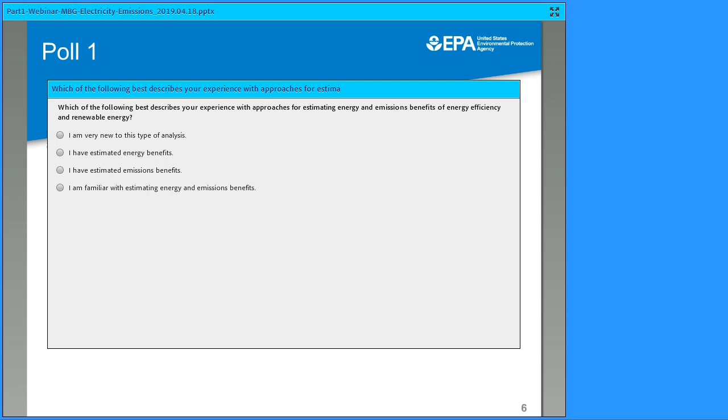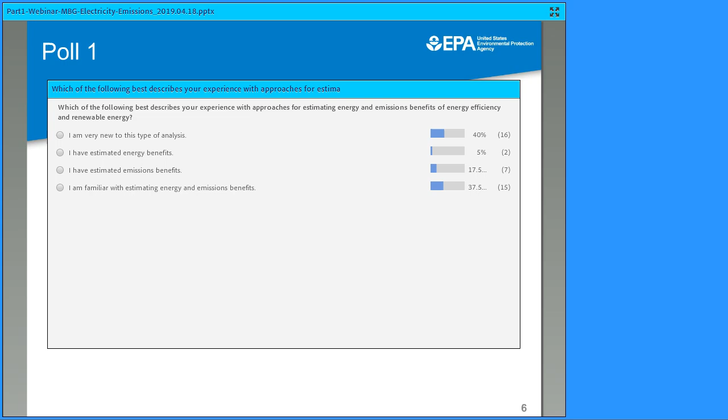Okay, so it looks like we have a good split of a lot of folks that are new to this type of analysis, and then some that are familiar with it. So this is a nice range of folks to have on the call, and we're hoping that we can increase everyone's knowledge about quantification a bit this afternoon. So the way that we're going to work from here is that I'm going to start the presentations today by giving an overview of a resource that EPA recently updated called Quantifying the Multiple Benefits of Energy Efficiency and Renewable Energy, a guide for state and local governments.

You can use this guide to learn more about different methods and tools that you can use to quantify energy and emission benefits. Speakers after that will be talking about those methods and tools. We have a great lineup of analysts who will talk about their own experience quantifying energy and emissions benefits from energy efficiency and renewable energy, describing a range of basic to sophisticated methods and tools that are also described in the multiple benefits guide that I'm going to talk about first. So without further delay, I'm going to jump right into the overview and give you information about the multiple benefits guide.

The resource that I want to talk to you about today will give you a lot of information about methods, tools, and data sources that you can use to do your own analyses of emissions benefits from energy efficiency and renewable energy. The guide is divided into two parts. The first part talks about what, why, and when you would quantify the multiple benefits of energy efficiency and renewable energy. The second part gives you information about how to quantify them, so the different methods, tools, and steps that you can use.

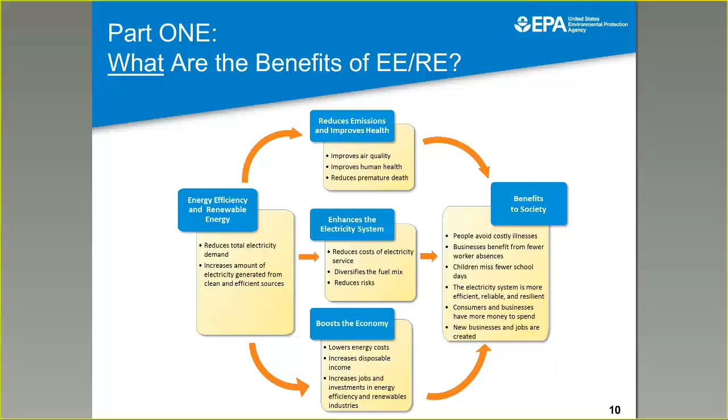It can also boost the economy by creating jobs and saving money. Collectively, energy efficiency and renewable energy can generate great benefits to society, and we talk about that in the guide.

Then we also talk about when and why you would quantify multiple benefits. There are essentially two points we'll talk about. When you're designing policy options, you're considering a whole list of different programs that you might implement. That's a good time to stop and think about what are the potential impacts of these options I'm considering, and how much will they bring me closer to the goals I'm trying to achieve. What kind of benefits will they deliver for us?

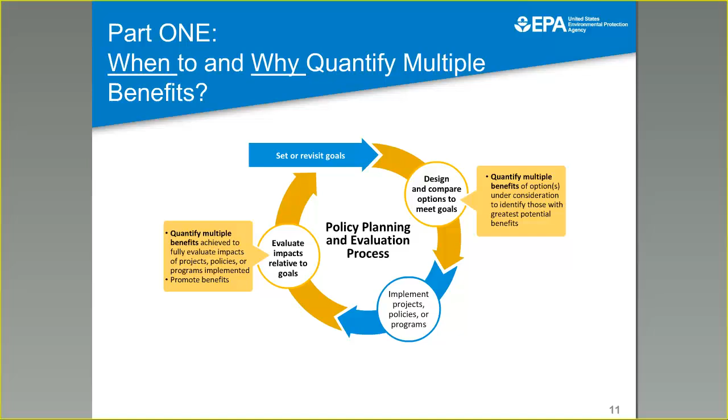Then it's good to go back after you've designed policies and programs, or after you've implemented them, to evaluate the impacts. Did they meet your goals? Did they get you what you were looking to achieve? And if not, maybe you need to modify the design of the policies or programs.

Once you get to part 2 of the guide, it talks about how you can quantify multiple benefits. From here, with any analysis, you have key considerations. You're going to identify the purpose, the priorities, and the constraints that you have for your analysis. It's important to understand the different types of methods available to you, and I'll talk a little bit about that in a few minutes. Then it's important up front to map out the strategy for the analysis.

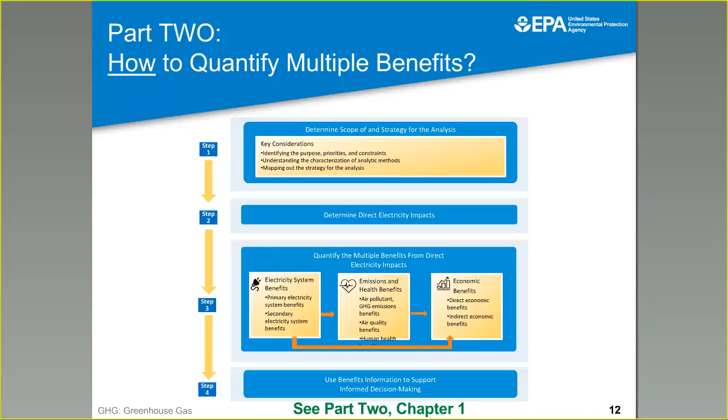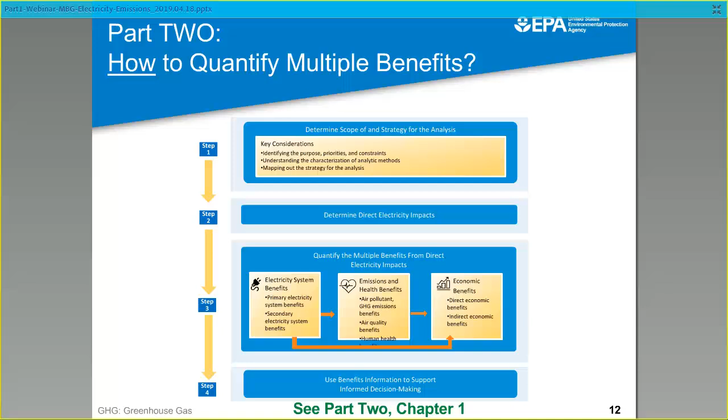From there, you quantify the direct electricity impacts. That's really the foundation for any subsequent benefits analysis, figuring out what are the electricity impacts that you're going to then use to quantify the electricity system benefits, the emissions and health benefits, or the economic benefits. Together you can use that benefits information to support informed decision making.

So what we have today is, as part of choosing a method for quantifying the impacts, there are some considerations that you'll think about. And those include: what benefits do you care about?

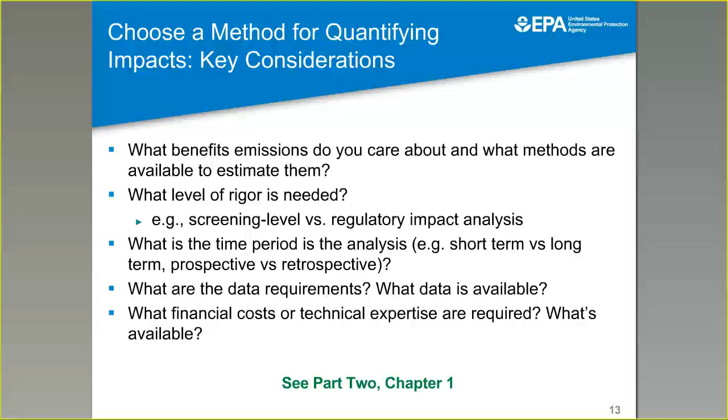For example, in this call, we're talking about emissions benefits. What level of rigor is needed? Is it a screening level analysis or a more rigorous regulatory impact analysis? What is the time period of the analysis? Is it short-term or long-term? What kind of data do you need? What kind of data do you have? What are the financial costs or technical expertise required of a particular method? And what resources do you have available for it? These are all things you'd have to consider regardless of what analysis you're planning.

But you can then use the guide to map out the different benefits that you're going to quantify and look at the methods that are available for you. This schematic depicts the different chapters in the multiple benefits guide, showing how, starting with direct electricity impacts at the top, you can quantify either electricity system benefits, the emissions and health benefits, or economic benefits. Today we're going to be focusing on the top two boxes really—electricity benefits and the emissions benefits.

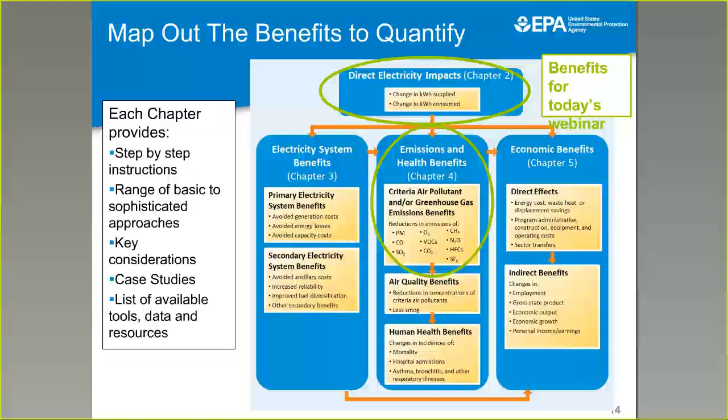In each chapter, you'll find step-by-step instructions, as well as a range of basic to sophisticated approaches that you can use. We have key considerations that give you tips on what to do as you're planning and conducting your analysis, as well as case studies and lists of tools and resources that are available for your purposes.

Here's an example from the chapter on estimating direct electricity impacts. You have options at this point of an analysis. You can either adapt existing studies that others have done for similar programs, for different energy efficiency or renewable energy programs, maybe in a neighboring state, adapting it to your own conditions or assumptions. You can also use data from energy efficiency or renewable energy potential studies to set some targets and goals for what you'd like to achieve through your policy or program, or you can conduct your own new analysis using different methods and tools that are available.

There's a range of assumptions that you would need to consider, and you can find more of them in the guide. For example, the program period—how long will this program be in effect? What is the target of the program? What is the anticipated compliance or penetration rate—basically, how many people do you think you're going to reach through your program? How long are the savings going to last?

This is particularly important for energy efficiency. These are things you need to be thinking about, and the guide describes these assumptions with information about specific ways you can think about it. Transmission and distribution loss is something you can calculate into your estimates that you want to take into account, and also other assumptions like funding and program administration—how is your program going to be funded, and does that take away from the amount of money you might actually put towards the program? There's a variety of considerations that go into your estimation of direct electricity impacts, and you can learn more about those in the guide in Chapter 2.

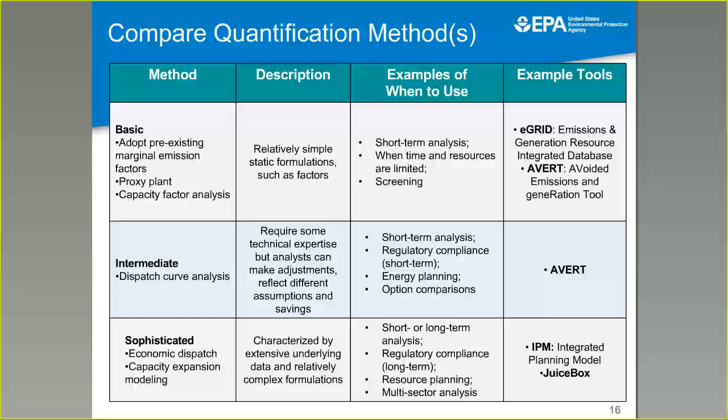At the other end of the spectrum is sophisticated modeling, which is more dynamic, more complex, and can be used for short or long-term analysis. An example of that is JuiceBox, which David Abel will be speaking about his experience using sometime during today's webinar. So there's a range of approaches you can choose, and there are lots of tables in the guide that can help you compare across the different methods in more detail and tell you the strengths, limitations, when you might use them, and examples. There are also flow charts and figures that can help you navigate the process and figure out, in a stepwise fashion, what you need to do given the approach you've chosen.

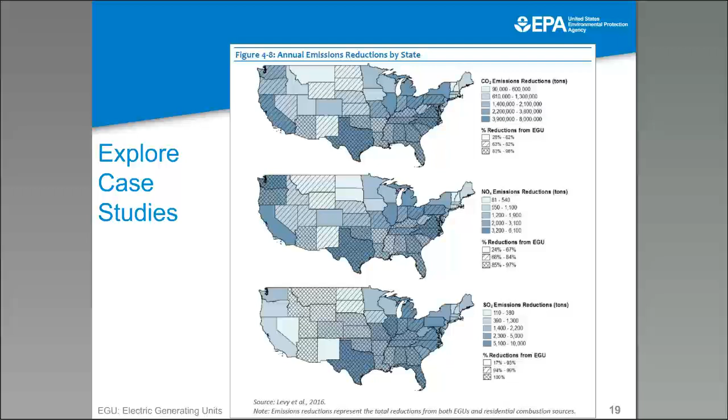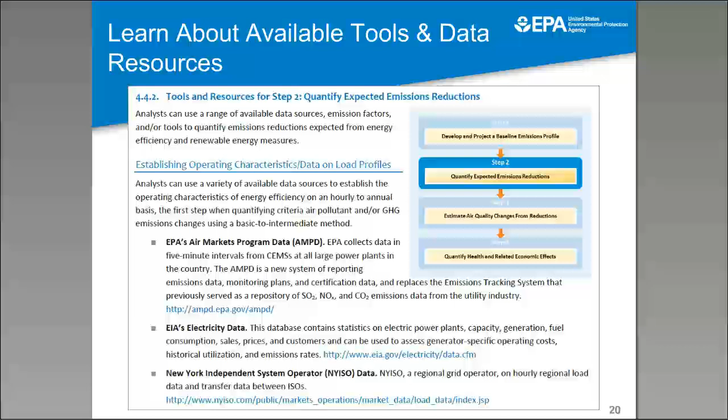And there are a lot of case studies that you can look to, to see how others have quantified similar types of policies and programs through their analysis. And finally, there's information about available tools and data resources that you can use for each chapter and for each step of the process that we described for you.

So with that, there's a link to the guide right here that you can link to, and we'll be posting the slides. You can certainly find it here, or by Googling it, or looking on our website. Essentially, I hope that you can look to this resource as something that can guide you in your efforts to quantify electricity and emissions benefits of energy efficiency and renewable energy.

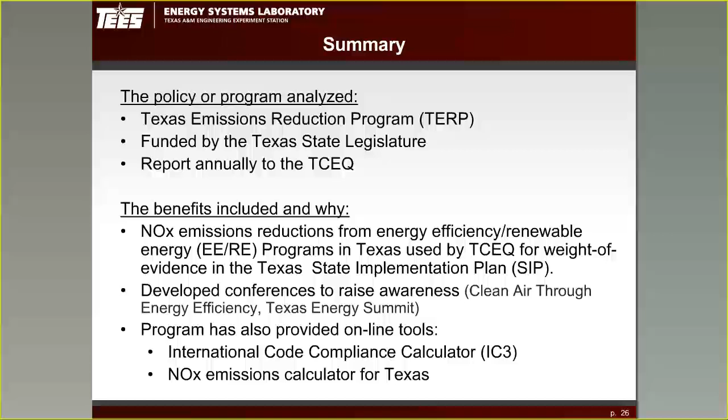Similarly, we were asked, how do we quantify the benefits within the state here? In general, we quantify each year's benefits as we go forward. We've been doing this since 2001, and we use the method for actually weather normalizing these savings back to the base year.

So depending upon which entity we're measuring, we use change point linear models for weather normalizing things such as wind energy savings. We use sliding averages on some of the data to give us some idea of how some of the wind farms are producing lately. And then we have special purpose models for things like solar PV and solar thermal analysis that were developed by the University of Wisconsin.

The data sources that we get our data from are the participating state agencies, the State Energy Conservation Office, SECO, Public Utilities Commission, TCEQ, and then the ERCOT, who provides a lot of the electricity data that we use for our basic analysis.

We also rely on data from 4 federal agencies. The EPA provides us with eGrid. National Renewable Energy Laboratory tracks a lot of the installations of renewables. And NOAA provides us with the weather data and the Energy Information Administration as well.

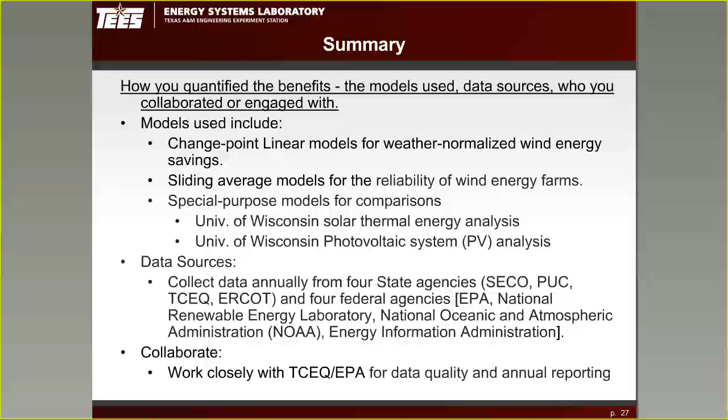So we're having to reach out to a number of agencies, and then we turn around and provide results to a number of different agencies. All of this is done very closely in collaboration with the TCEQ, and of course we do have a lot of oversight and cooperation with the EPA for our data quality and our annual reporting.

So our work was legislated within Texas. Back in 2001, we were faced with a very strong mandate to improve the air quality within the state. So our original legislation was set forth to enable this work.

I'm not going to go through this in detail, but you can see through the years it's been added and modified clear up until the current time, where we have a number of specific responsibilities that the lab has to produce as part of our funding from the legislation. Part of that is the actual calculations of the emissions reductions.

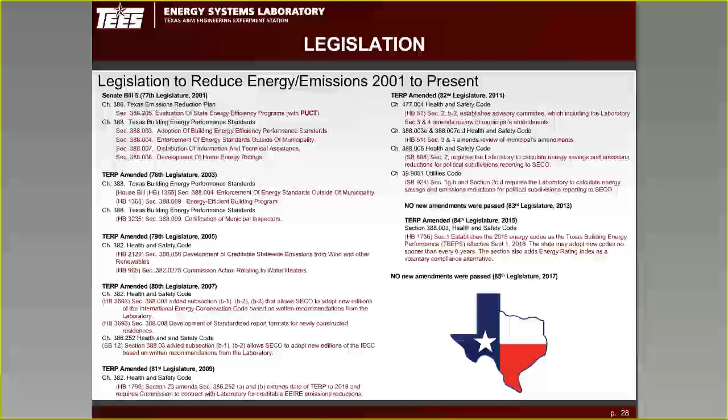Our credit for the emissions reductions follows the EPA criteria for SIP credits, which have 4 primary elements. First, the emissions reductions need to be quantifiable. So we have to provide a method for quantifying the emissions reductions. We need to review that method with TCEQ and EPA, and then we use that method year after year to quantify the emissions. That method needs to make sure it doesn't account for savings that are already accounted for somewhere else, so we have to be careful of any surplus accounting and abide by that accordingly.

We also have measures that need to be enforceable. For example, building codes are enforceable. When you install a wind turbine, it's something that actually exists, not a hypothetical thing. Similarly, we have to perform the record keeping. So if somebody wants to go back and look at the savings in 2013, 2015, or 2006, all of that is kept online in the format required by the TCEQ.

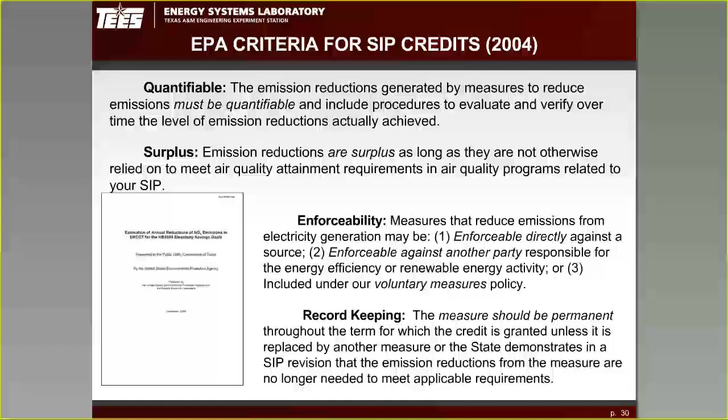As I said, this is part of a larger program that does emissions reductions from not only renewable energy but also energy efficiency. There's a number of areas we do emissions reductions on that I won't be talking about today, but we have information available on our website about that. For example, single-family construction, multifamily, commercial construction, and this is construction to code or above-code programs. Likewise, green power production, which I'll be talking about today.

We also take information from the public utilities programs, energy efficiency efforts, and incorporate that into the emissions reductions—energy efficiency programs managed by the State Energy Conservation Office. One item here, and we've had additional items from time to time that we're tracking, is air conditioner improvements as people retrofit their houses and commercial buildings around the state.

So today I'm going to be talking about the savings from renewables. Primarily we'll be talking about savings from installations of photovoltaic, both on residential, commercial, and utility scale, solar thermal installations, hydroelectric, biomass, landfill gas, and geothermal installations. However, the big ticket item, as we'll see from some of the results coming up, is the emissions reductions from the wind farms that have been installed around the state since about 2004, 2005.

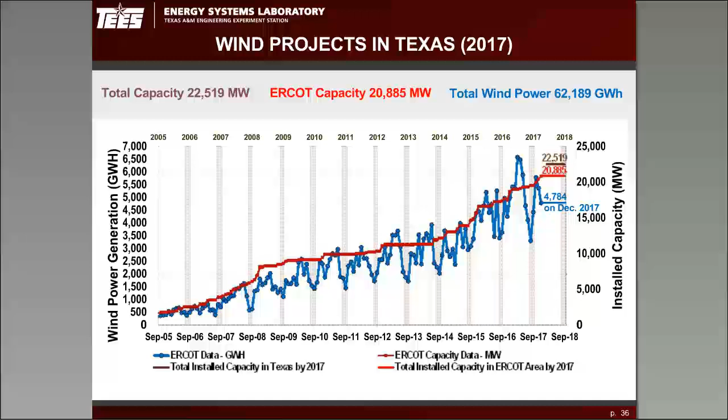This graph with the shaded bars going down shows you the years we've been tracking wind farm electricity production. You can see the dog days of summer, which are the shaded bars, are the periods when we tend to have the lowest production of wind. Those are usually during the summer period—unfortunately, when the electricity requirements are the highest. So there is a bit of seasonality to the wind within the state.

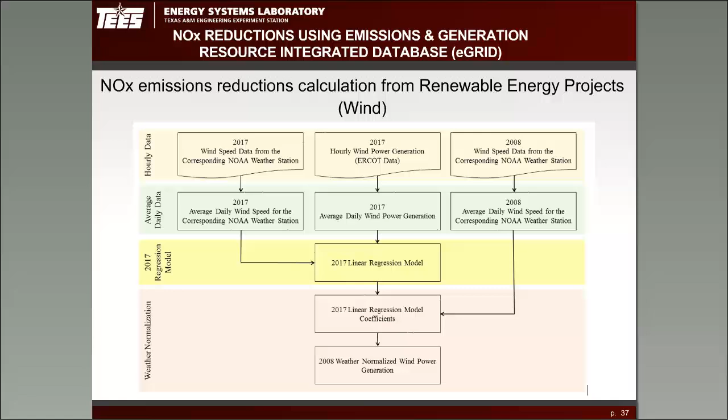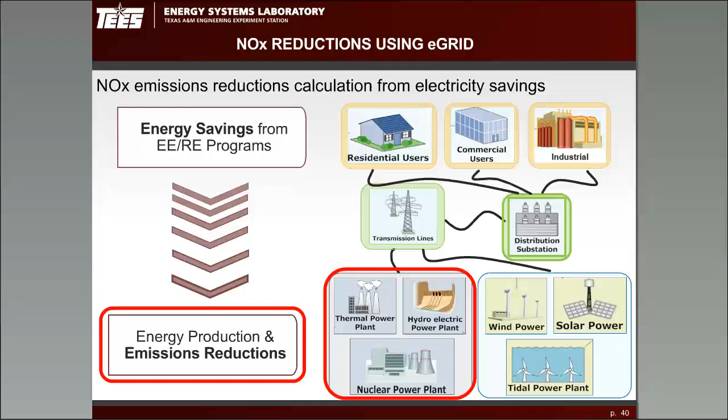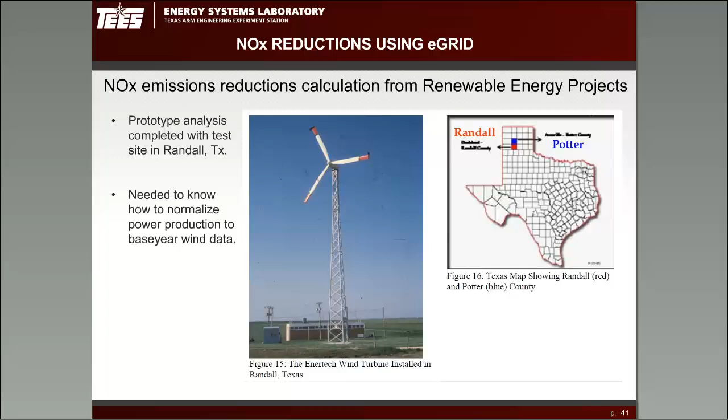So if we look at wind energy, for example, one of the early sites where we tried to prototype this was a research facility up in Randall, Texas, where we had an Enertech wind turbine. We looked at the data coming off of that wind turbine and found there's a pattern to that data, which you can see here.

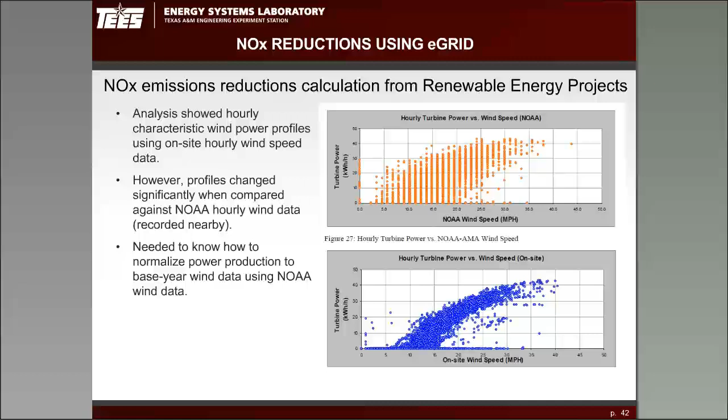The upper orange dots are basically the power coming off the turbine plotted against NOAA wind data. The blue dots, which are much better defined, are the same wind power plotted against on-site wind measurements. One of the problems is that it's more applicable to use the NOAA wind data than the on-site wind data, so we shifted from the on-site wind data to the NOAA wind data.

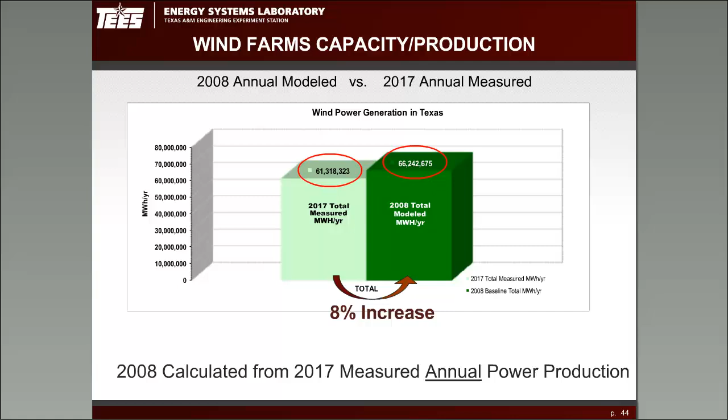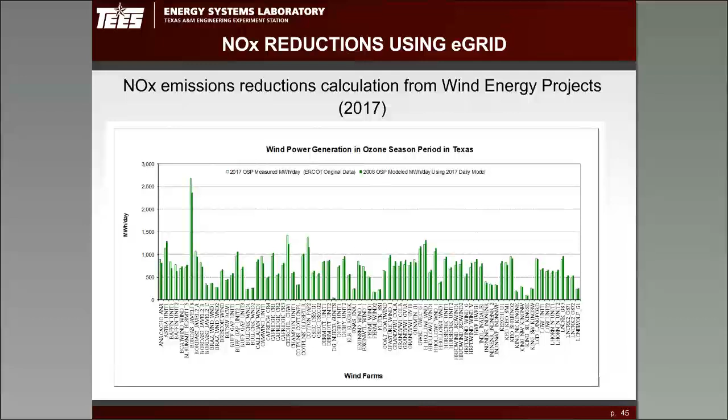We developed daily regressions, change point linear regressions, which give us the average daily wind savings, and we use that to do the forecasting. So in this case, we're actually able to take 2017 data and backcast it to the 2008 base year. We've done this now across all the wind farms in the state, so that looks something like this when you add it all up, giving us the total savings for the wind farms.

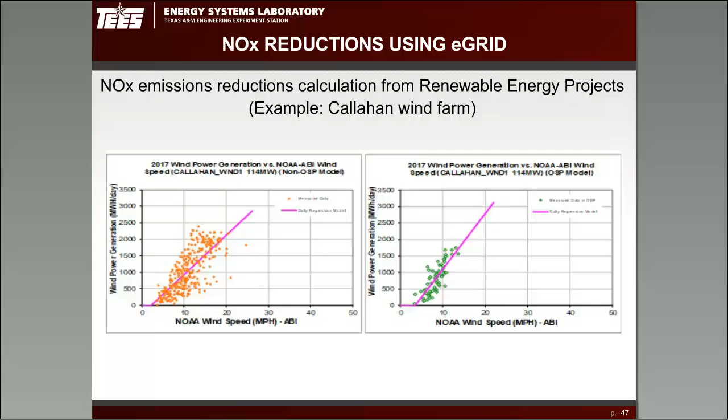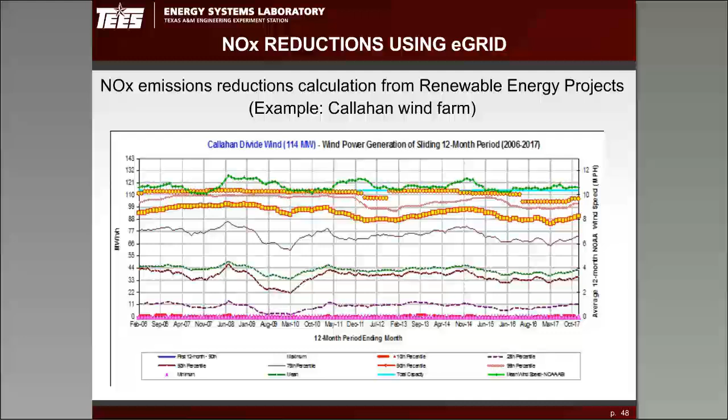Here's another example from one of those wind farms, the Callahan wind farm. Here's the actual hourly data, the daily average data during the ozone season period and non-ozone season period, and what it looks like when you've been tracking data now for 10 to 15 years. You can begin to start answering questions about how reliable that data is.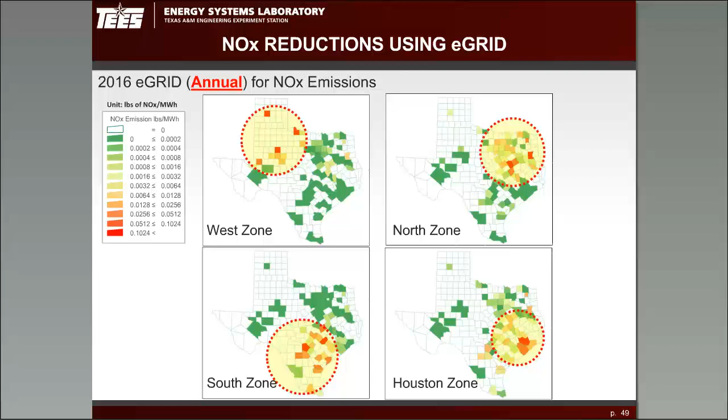We know exactly where the power plants are in the state thanks to eGrid, so we're able to track that and then take it back to the power plants that would have provided the power during the periods the wind were blowing. In Texas, we have 4 congestion management zones shown there, and that's how we divide things up around the state.

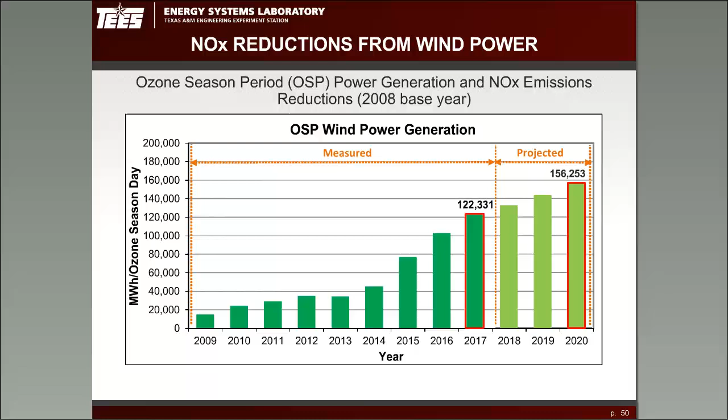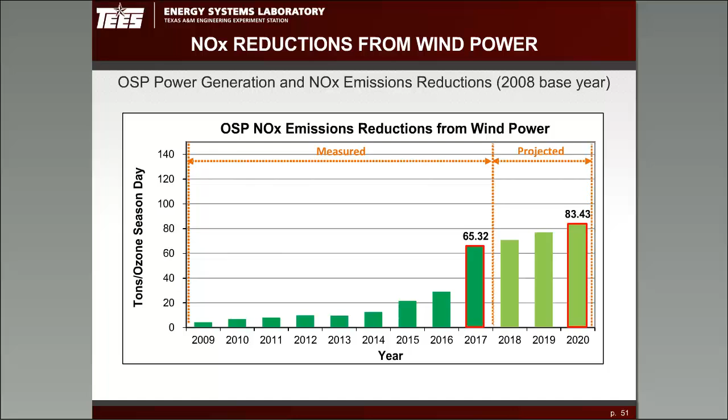The results we've seen for wind energy production, for example, last year were about 122,000 megawatt hours on an ozone season day. The actual NOx emissions reductions were about 65 tons of NOx on an ozone season day. You can see a dramatic jump between 2016 and 2017, which was basically a resetting of the numbers within eGrid.

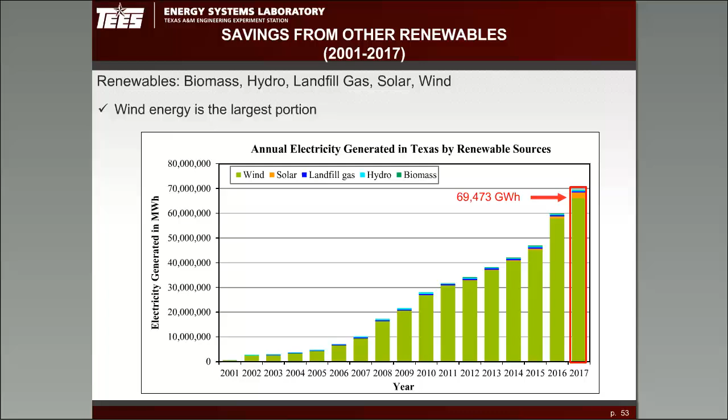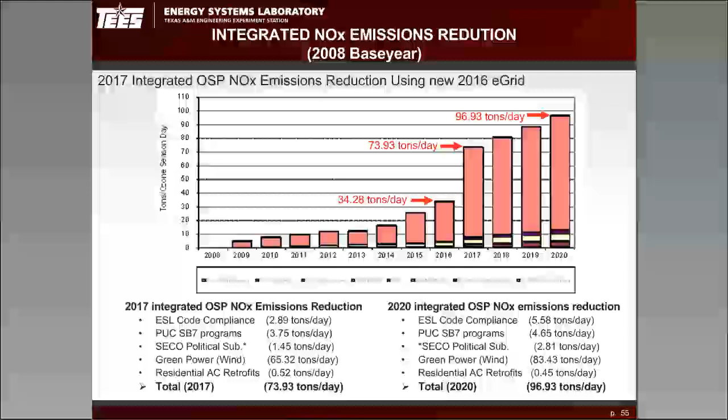This is what that looks like across all the projects, and the results of the analysis we report to the legislature. The outcomes have provided Texas with NOx creditable emissions that can be used in the weight of evidence. The challenges, of course, are gathering all this data, coordinating across state agencies, and doing this over a 17-year period.

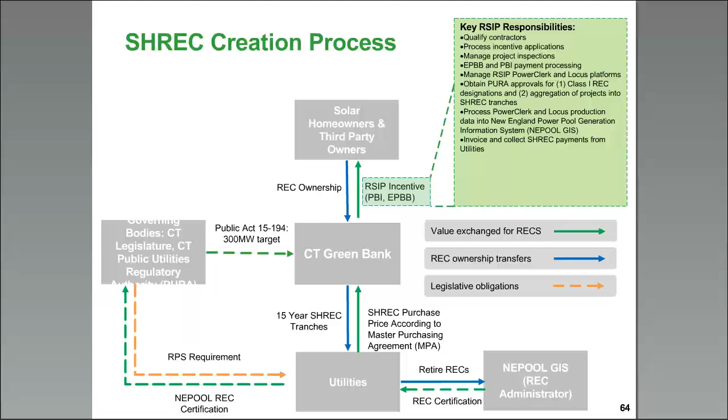We started working to sell those, and through that process we started getting feedback that investors really didn't just want something to be certified in terms of a transaction—they wanted to know what the impact was. So we thought this is a great opportunity for us to showcase to impact investors what we're actually achieving through this, and what they can achieve by joining in on our transaction.

So this is all just an overview of what we did for the SHREC transaction, which ultimately ended up being about $38.6 million we took to market. So what is the actual impact of the SHREC bond? What's the impact that the investors in this would have? We wanted to model that.

At the Connecticut Green Bank, we have some pre-established methodologies across the organization, but we didn't just want to use those—we wanted an outside opinion. So first we said, let's make sure we get this rated by an outside verifier. We engaged, through an RFP process, Kestrel Verifiers to assess the bond. They did a certification, and we have filed our paperwork.

We're still awaiting the official stamp, but we have no reason to believe it won't be certified as a climate bond per the Climate Bonds Initiative standards.

We really wanted to get that impact quantified, and we wanted some sort of outside methodology that would be trusted by the market. We wanted to say: what did these achieve? What greenhouse gases were avoided? How much cleaner is the air? What were the public health impacts? What were the economic impacts? So we engaged with the Climate Action Reserve to do that.

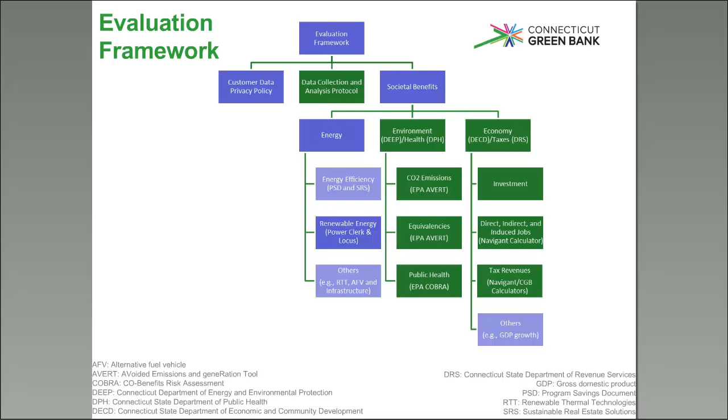Just as the Green Bank, we have our overall framework of evaluation, with a bunch of different methodologies that we can use. Here I'm going to focus on our environmental methodologies.

We employed AVERT about two years ago as our new official methodology for estimating the impact of air quality improvements due to our activities. Initially we were doing this when looking at larger projects, to say, if we finance this wind farm, this is what we can expect the impact to be.

However, the vast majority of our projects, especially in the RSIP program, are small one-house rooftop solar projects or an aggregation thereof. So we needed a way to operationalize this, since we couldn't run each project through AVERT individually. Through a regression analysis, we developed factors that work in the state of Connecticut, taking the type of project—energy efficiency or solar—and using the standard built-in assumptions of AVERT to translate that into factors for NOx, SOx, CO2, and particulate matter. So we built that in.

We've automated that through our data warehouse, and with respect to the SHREC fund and every other program we had, we were able to create some estimates.

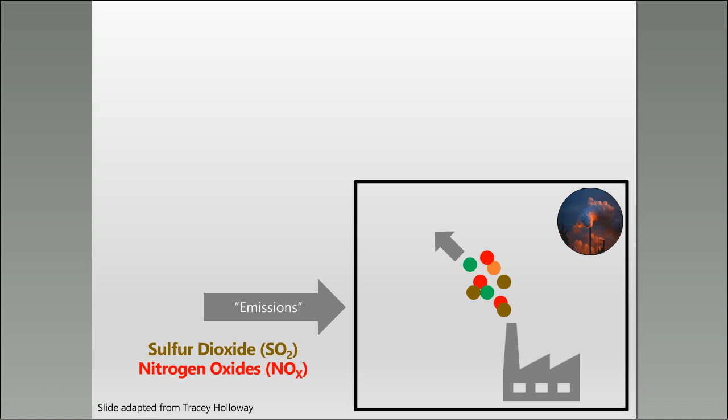Just to make sure we're all on the same page, when I'm talking about emissions, I mean emissions from power plants, predominantly two pollutants: sulfur dioxide, SO2, and nitrogen oxides, or NOx. The reason these are what I'm talking about is because what we really care about and regulate in the U.S., as far as criteria pollutants go, are ambient concentrations in the atmosphere.

The two pollutants that are really public enemy number 1 and number 2 for public health are fine particulate matter, PM2.5, and ozone. SO2 and NOx both contribute to PM2.5 and ozone in the atmosphere. And then, of course, we can't forget about CO2 as a greenhouse gas. We care about it for a slightly different reason, but it's very interrelated with all of this work.

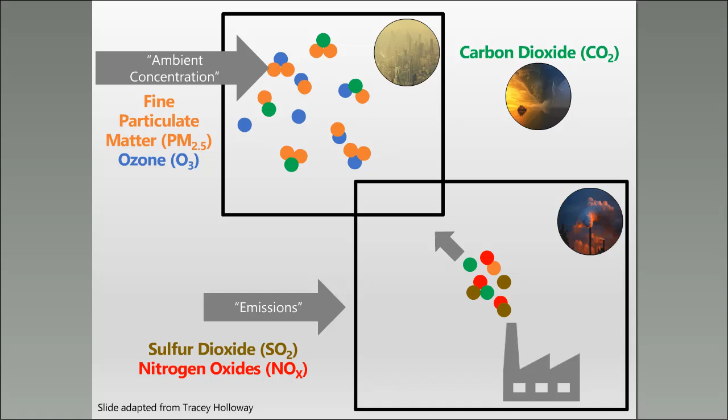Why do we care? Why are there air quality regulations to begin with? Why is anybody like me doing research, or funding this type of work? It really comes down to the fact that this is a big public health benefit to control and manage our air quality in the U.S. and globally. In the U.S. we spend about $50 billion a year under the Clean Air Act to achieve standards, and the reason we do that is because it has huge benefits. We've shown there are about 30-to-1 returns in health benefits from that $50 billion spent every year.

I'll show pictures here of concentrations of NOx pulled from a satellite instrument called the Ozone Monitoring Instrument, between 2005 and 2016. You can see the drastic improvement in air quality over the last 11 to 13 years. This 100,000 deaths a year in the U.S. is really to make the point that even though air quality has been a big environmental success story in the U.S., that's still the number we're working with, and still a big impact from air quality we have to address.

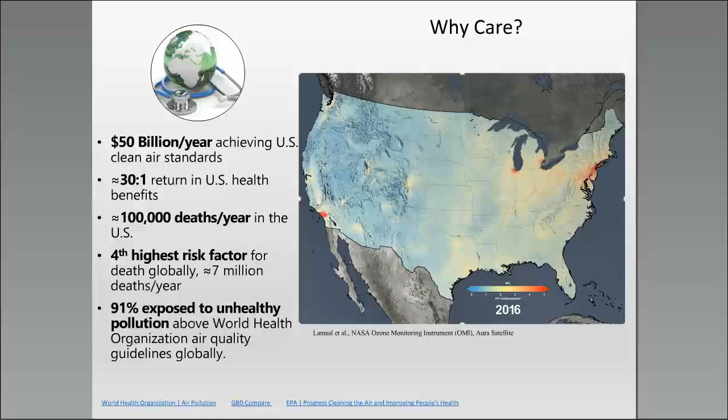And of course, if we zoom outside the U.S.—the work I'm talking about and most of what I've done focuses on the U.S.—but if we zoom out, it's a much bigger problem. I think the number that really epitomizes that is that 91% of the global population is exposed and lives in a region with pollution above what the World Health Organization deems as safe.

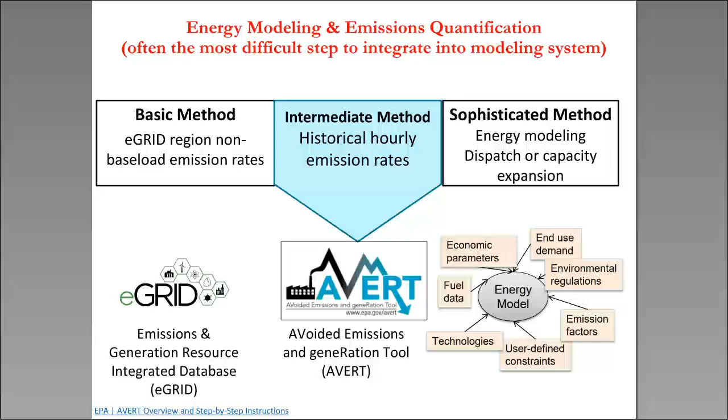So you have a model that actually simulates reality by taking in fuel prices, environmental regulations, emissions factors, and different technologies, and combines all of that to then calculate, in this case, dispatch—which power plant is going to produce how much energy and how many emissions, and when.

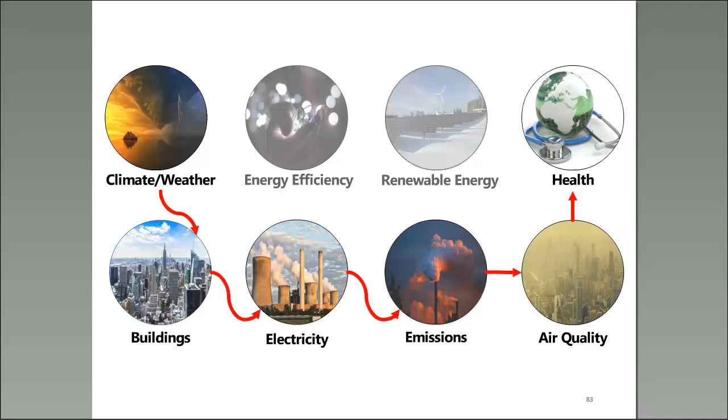The first thing I want to talk about is related to the benefits of energy efficiency and renewables, but actually more of a warning. This was a long-term project we worked on through the National Institutes of Health, recognizing that as the climate warms, one of the first things we're going to need to do to adapt to higher temperatures is cool our buildings more and use more air conditioning demand. That means we're going to have to produce more energy from somewhere to power those air conditioners. You can draw this connection all the way from climate and weather through building energy demand, electricity production, power plant emissions, air quality, and then health.

And that's what we did with a series of models. This work was published in a special issue of PLOS Medicine last summer on climate change and health, covered by The Economist, and was a highlight in Nature Climate Change. The way to think about this study is—I'm going to go through this fast so I can talk about two different things.

The way to look at this study is really just through three different scenarios: one being present day, current reality; then two future climate scenarios looking at what would be the impact of a warmer climate alone, in this mid-century adaptation scenario; and the third being what would be the impact of climate plus the added emissions from increased air conditioning use.

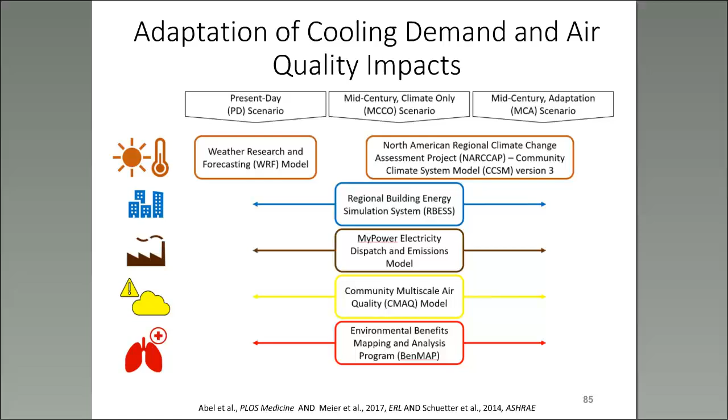We used a series of models, starting with modeling the weather and the climate—future weather—then running a building sector model to estimate what energy demand in buildings actually would be, and then feeding that into the real big model I want to talk about, MyPower, or JuiceBox, which calculates the electricity dispatch and online emissions from each power plant, before feeding into a chemical transport model that calculates the air pollution, and a health impacts model that then turns that into why we care about that air pollution change.

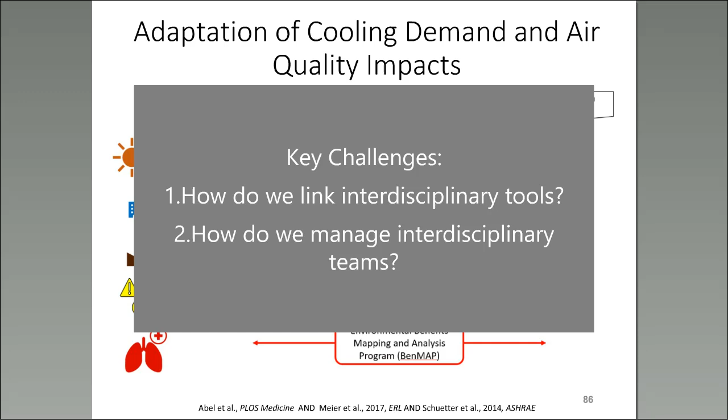So a couple key challenges with this work are: how do we link these interdisciplinary tools, and how do we manage interdisciplinary teams? This is often a big issue with sophisticated energy models, because in many cases those models were not built specifically to do air quality research or even emissions work at all. Or if they do emissions work, sometimes they stop at CO2 and greenhouse gas emissions because they're a little easier to quantify. So connecting all these steps together is definitely non-trivial.

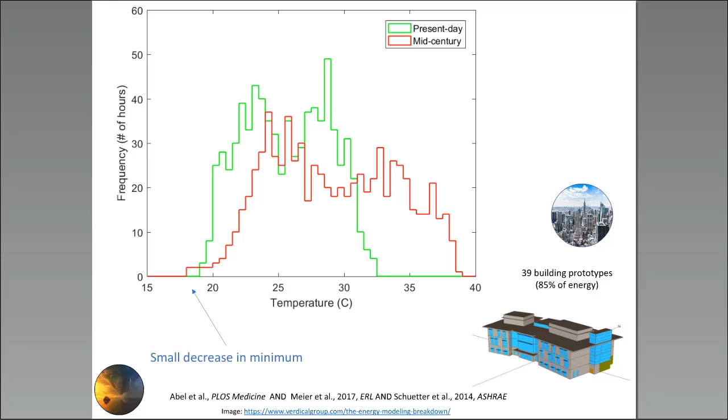The first thing I'm showing here is to make the case that yes, in a mid-century climate, the eastern U.S. is warmer. In the present case, you can see there's actually a small decrease in minimum temperatures by the middle of the century, but there's a huge increase in the frequency of high temperatures across the eastern U.S. by the middle of the century, and greater variability overall, which fits within what we know about future climates.

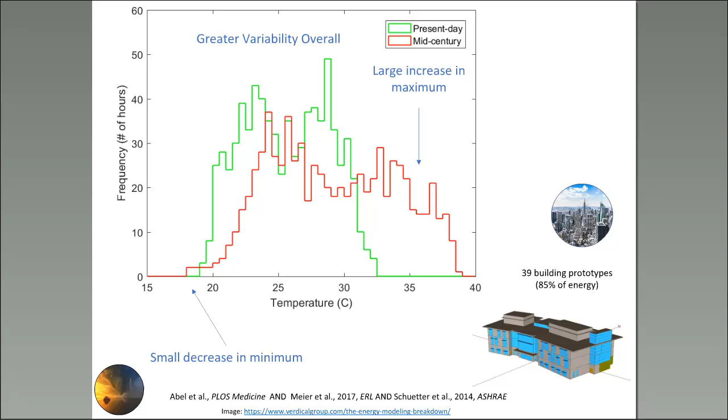What this allows us to do by having this scenario is we built 39 different building prototypes that represent 85% of energy demand. By feeding this new meteorology into that model to recalculate energy demand, we can then approximate what energy demand in the U.S. might look like in a future warmer climate.

Once we have that information, then we can go to the real meat of this talk, right? The actual emissions quantification piece. So what we used is something called MyPower, originally developed by Paul Meier and Meier Engineering Research as an educational tool. If you look for it, it's much more commonly known as JuiceBox.

What this does is it was really meant to fill a gap between AVERT and super, super sophisticated, difficult, market analytic type energy models that weren't really built to do emissions work.

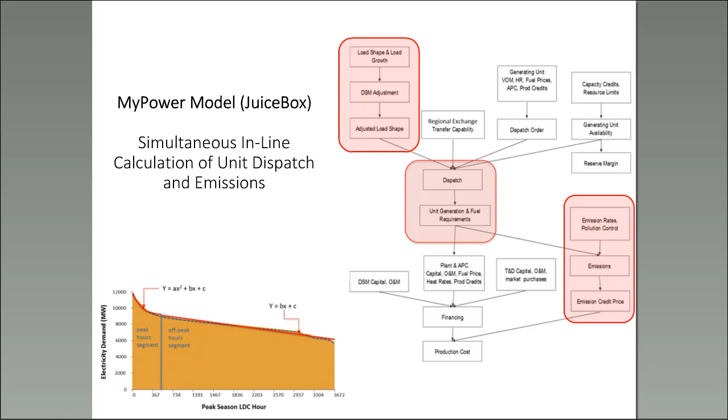This is built to actually do inline emissions quantification, so we can provide it load shapes based on what came out of our building models, as well as lots of different data sets on the types of power plants out there, fuel costs, and things like that. It can calculate dispatch and emissions inline using what's called a load duration curve approach. I can talk more about that if there are questions, but I'll move on now to what we get out of that model.

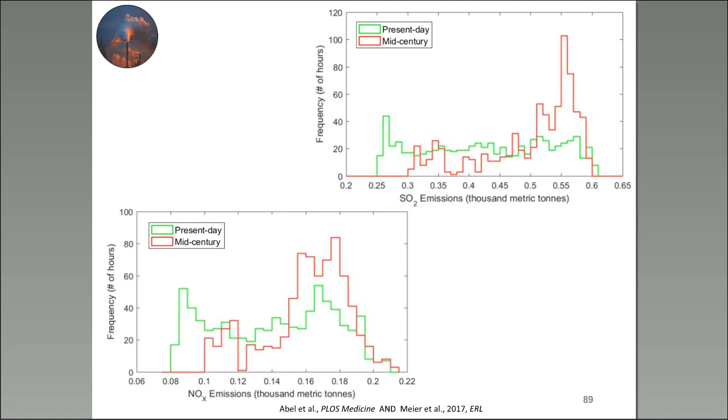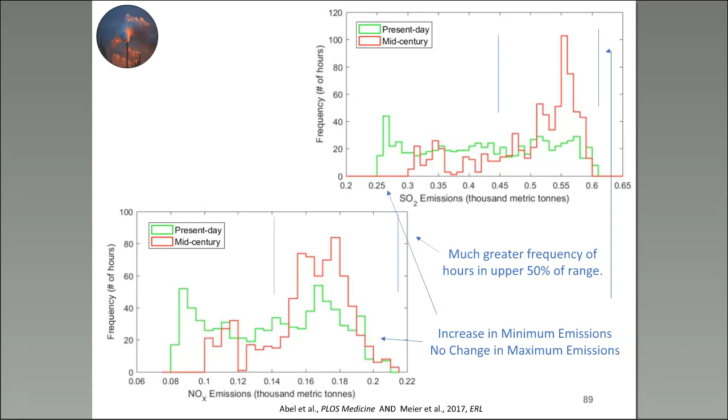What we get out that we care about for this type of work is the emissions. Here I'm showing histograms just like the temperature, of SO2 and NOx emissions. There's slightly different behavior here than what we saw for the temperature. I think the biggest thing is that there's not really an increase in the maximum number of emissions at any given time over, this is one month in the summer. But there is an increase in minimum emissions, and a much greater frequency of emissions in this upper 50% of the range that we might see from power plants.

The reason this occurs is because what we see in the future climate is not really a dirtier mix of power plants overall, but that the dirtiest mix of power plants has to run more often to meet these times of higher demand with greater air conditioning.

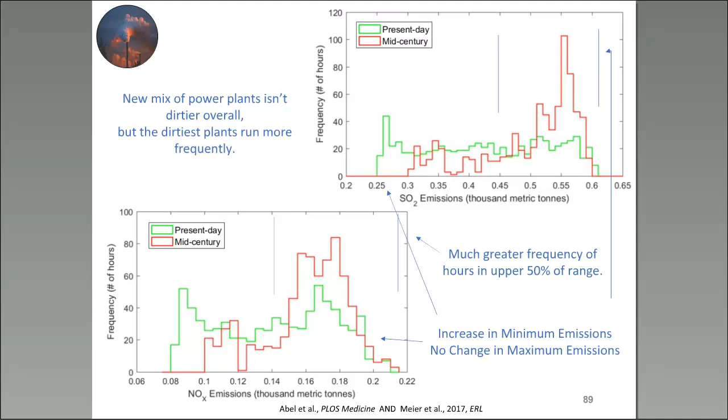I'm going to jump through these key findings pretty quickly because there's actually another webinar in the middle of May where I'll talk more about some air quality and health takeaways from this type of research. But what we found was about 16,500 deaths related to PM2.5 and ozone exposure annually in a future climate.

This fits within what some other work has looked at by just examining climate's impact on air quality. But the real new piece here is that about 1,000 of those deaths, or 5 to 8% for PM2.5 and ozone, are due specifically to increased air conditioning use or adaptation. And why that's really important is because that's something we can control, right?

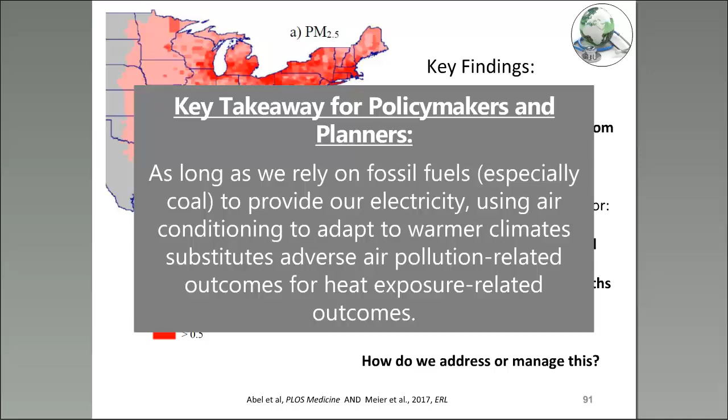But by doing that, we're just substituting air pollution-related outcomes for heat-related damages until we can create a cleaner electricity grid. So then the other natural question is how do we address this and manage it from the production side? And of course, one obvious solution is more renewables.

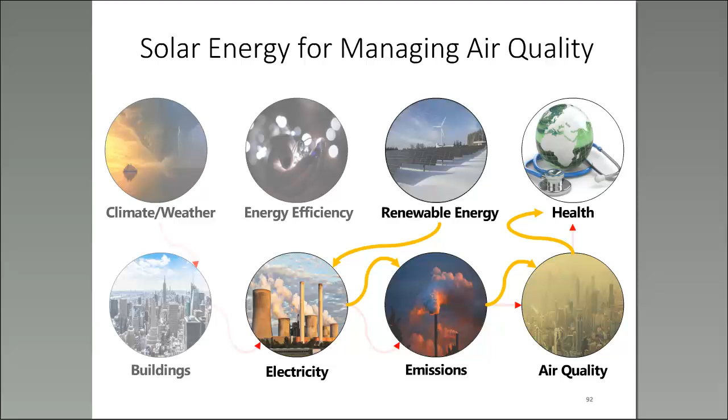So we decided to take a look at solar energy for managing air quality. What would happen if we got to high levels of penetration of solar throughout the eastern U.S.? The way we approach this uses a second, more sophisticated model used in analysis at the National Renewable Energy Lab. They did a series of studies through the Sunshot Initiative to look at barriers and opportunities to getting to high levels of solar across the U.S.

And we took a scenario that they ran through this GridView model that was about 20% solar throughout the U.S., and looked at what the barriers and challenges to doing that are.

Why I really wanted to talk about the GridView model is because it really gets at the fact that not all of these models were developed to do air quality research, and this model certainly was not. It's a very sophisticated model, but it's meant for more market and economic objectives. It builds in a lot of detailed representation of the transmission grid and market scenarios.

I'm happy to talk about that more afterward if we want, but I'll keep moving so I can get through everything now. But what it does not do is calculate emissions.

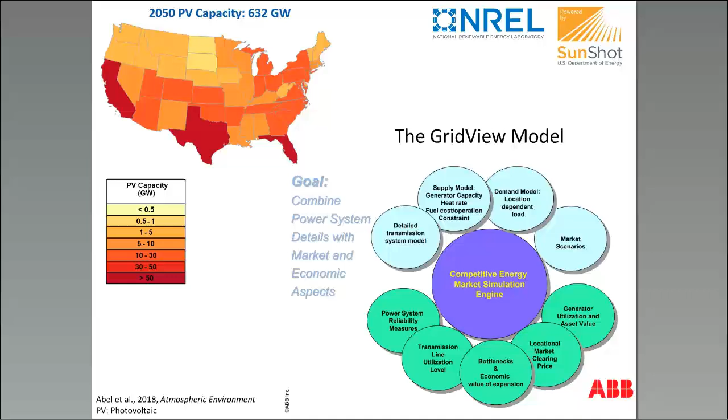So to get the value of that sophisticated model and the sophisticated work that NREL had done, we had to come up with a way to estimate emissions. What we ended up doing was take our two different scenarios - one being this base reality case, and the second being the high penetration solar case, which over the eastern U.S. ended up being about 17% solar by generation - and scale emissions from EPA's National Emissions Inventory by the change in generation at each power plant at every hour. It's kind of a simple approach, but it's actually much more complicated in doing this.

It involves first matching all the power plants from GridView with the power plants from the emissions inventory, then taking this hourly data and doing the scaling, and then capturing any extreme changes that might throw off the system.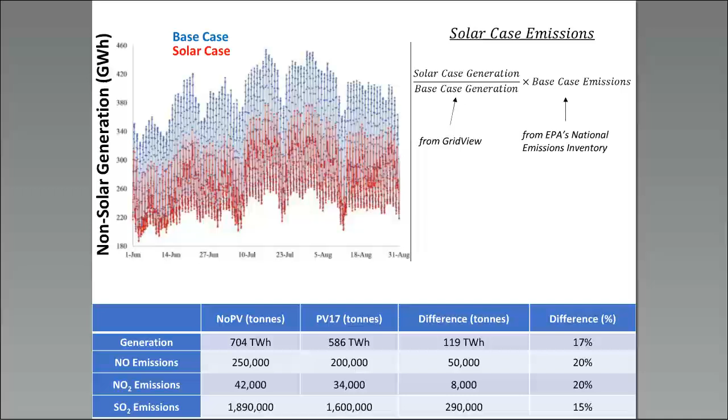At the end of the day, we get realistic results that show about a 17% decrease in traditional generation and mount in solar sources, giving us decreases in NOx emissions and SO2 emissions of 20% and 15% respectively.

One other thing this study allowed us to do was compare - because we only had one scenario of solar from GridView - a sophisticated tool like GridView with an intermediate tool like AVERT, to estimate the impacts at different levels of solar integration.

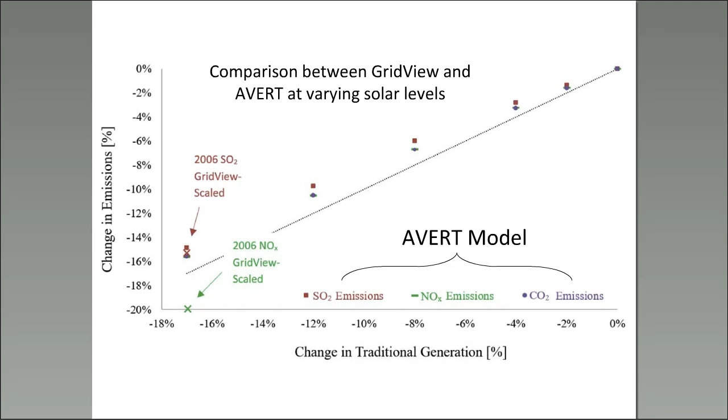This plot shows the level of penetration of solar from 0 to 17% versus the change in emissions. What we can see is that it's approximately linear, and AVERT does a very good job of capturing the SO2 emissions and a relatively good job of capturing the NOx emissions from GridView.

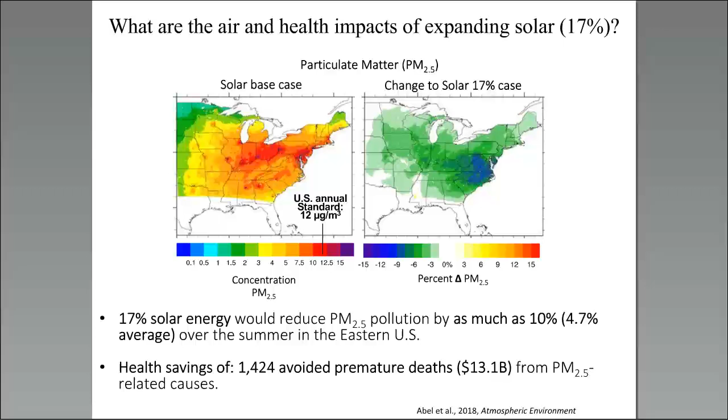And then the takeaways - what would we actually find, since it would be annoying to present a study and not give any really good results. What we found was that 17% solar energy would reduce PM 2.5 in the eastern U.S. by about 5% on average, and as much as 10% in some regions. This has health savings of about 1,400 lives saved annually, or $13 billion.

So to end, I'll say the answer to this big research question of whether we can inform the in-between energy, air, climate, health bubbles is absolutely - interdisciplinary models of varying complexity are all useful for analyzing this type of thing, from eGrid and AVERT all the way through the sophisticated tools. There are definitely cost-effective solutions for energy, air, climate, and health management all at once that exist. So thanks, and feel free to reach out to me with any questions now or after the talk.

Great, thanks so much, David. You did a really nice job presenting what otherwise could have been very complicated material, or what was a complicated process, in a very understandable way. So thank you for that.